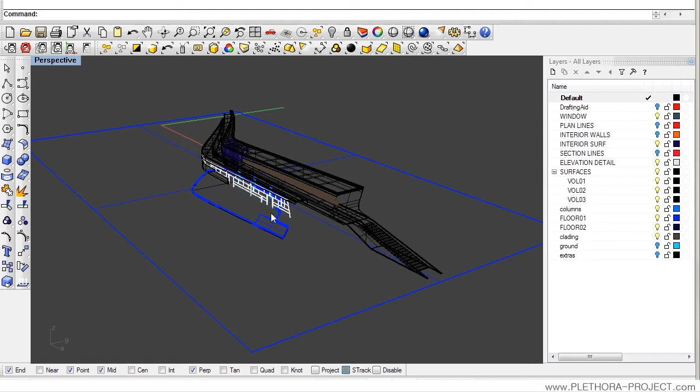I'm going to show a little bit of how to produce a drawing out of this content, hoping that you guys can actually finish the model yourselves and then make beautiful drawings with what we have learned.

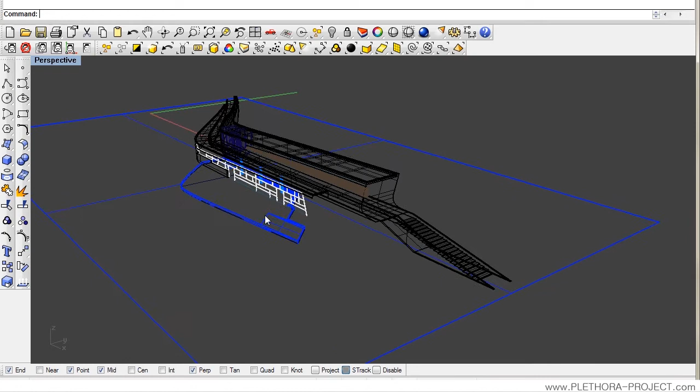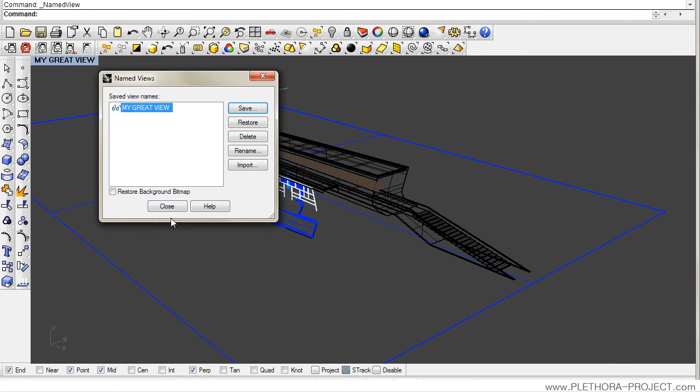The first thing I want to do is be able to store the perspective we're working in. Let's say I really like this perspective. So I'll go to Perspective, Set View, Named Views, and call this one 'My Great View.' You can see here it says 'My Great View.'

We can start moving around and decide we like some other views and name them too, but we can always just right click here and go to Set View again, and you see my views are saved. My Great View is here, and we can always go back to the saved position.

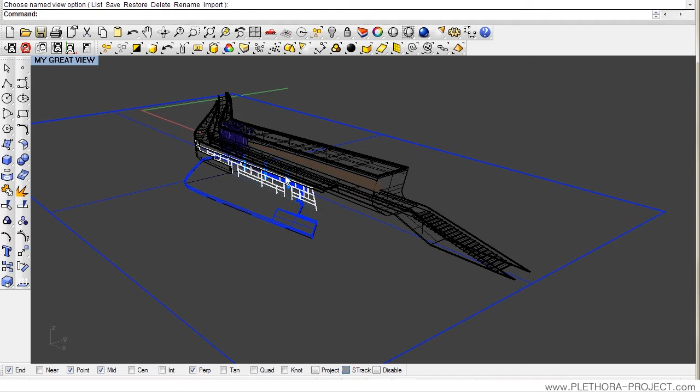This is good because let's say we start exporting content to some other package, like Illustrator, and we want to come back and do some changes. It's good that we have saved the camera, the perspective we're exporting.

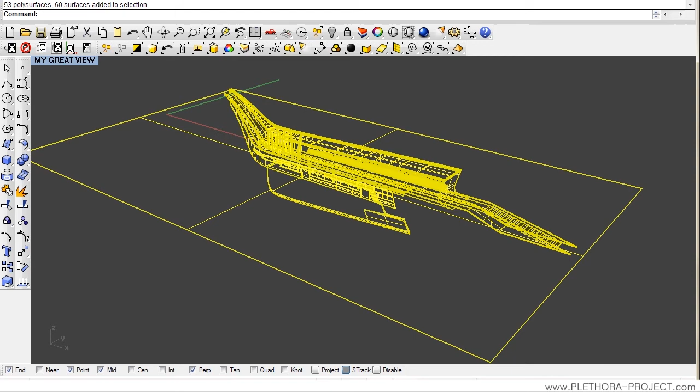So the first way to export this is to Illustrator. Let's pick everything, go into File, Export Selected, and I'll name it Test. Adobe Illustrator format, Test 01.

We export it, and everything is fine. We created a file for Illustrator, so we can go into Illustrator and open it, going to desktop, Test 01, and you see we have the drawing.

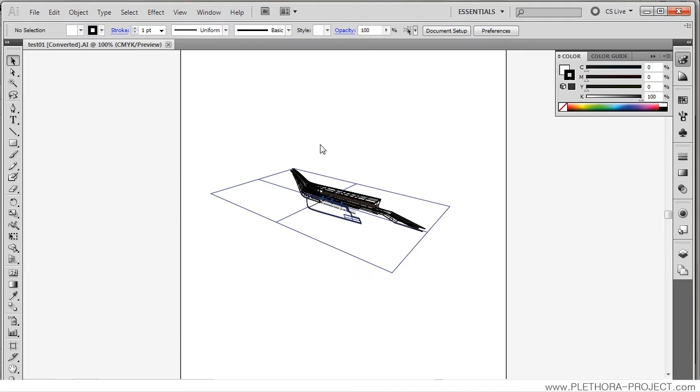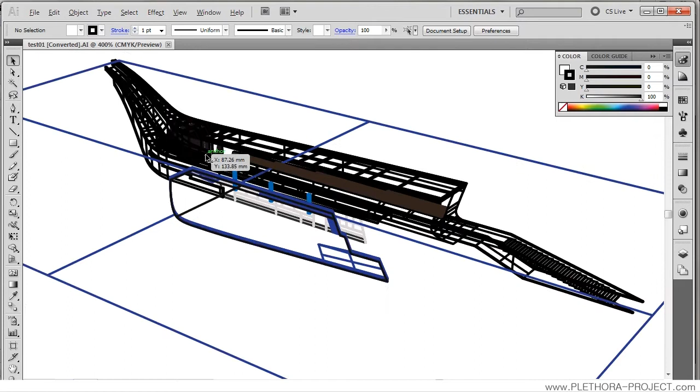The problem with this drawing is that if we zoom in—you can use Alt and the scroll wheel to zoom in and out in Illustrator—you'll see this drawing is only a wireframe. It doesn't remove the lines that aren't required for us, though obviously the line thickness is something we could change.

So let's start seeing how to deal with this drawing. I'll open this tab and close the stroke and swatches panels. The one I'm interested in is the layers, because the layers contain all the information.

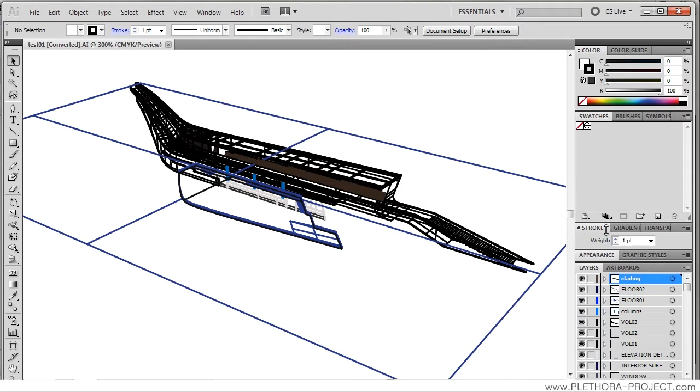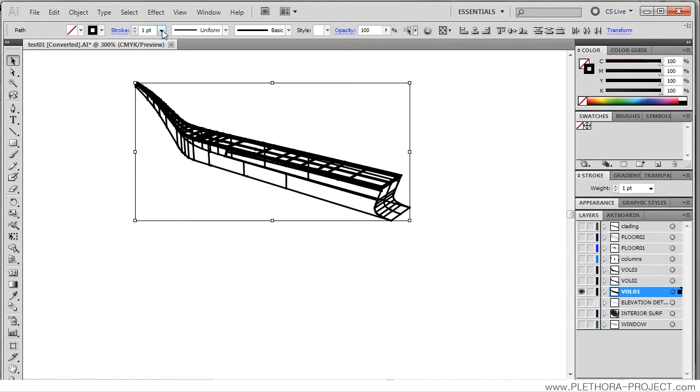You can see I can start graying out and hiding everything, and we have all the same layers that we have in Rhino. If we Alt-click here on a layer, we select each one of the individual elements. So that's something you want to do, so you can start assigning different stroke weights per layer.

0.01, really thin for instance—something like a hairline—and you can see the drawing is very detailed, and we can go really thin. Still at this point we could remove some of these lines.

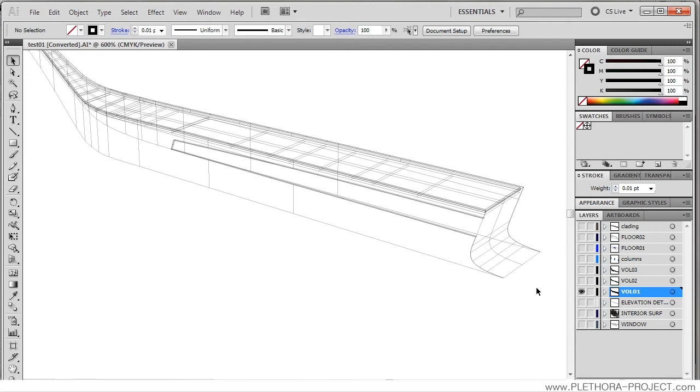If, let's say, you don't want to have that one, maybe you can delete it. And you should go layer by layer, changing the stroke weight of the layers. I'm Alt-clicking on the layer, so I could just go here and type 0.01.

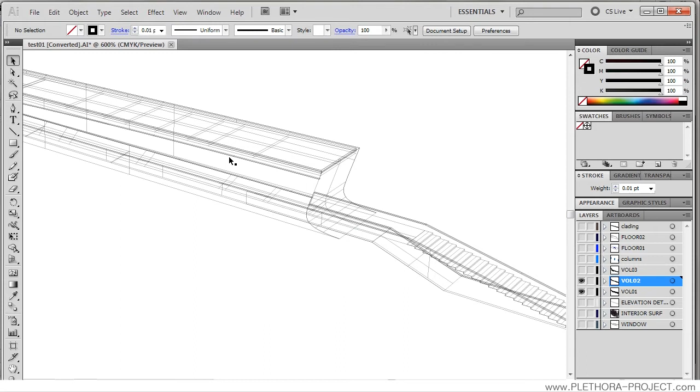Also you can specify that the color could be slightly different. So if you go for some gray color, you have to test print it because it might not really print well, but at least you have a visual reference of how these layers are going to work together.

So let's do that again—Alt-click on the layer—and maybe this one I want to leave slightly thicker. That seems too much already, so I'm going to put 0.08.

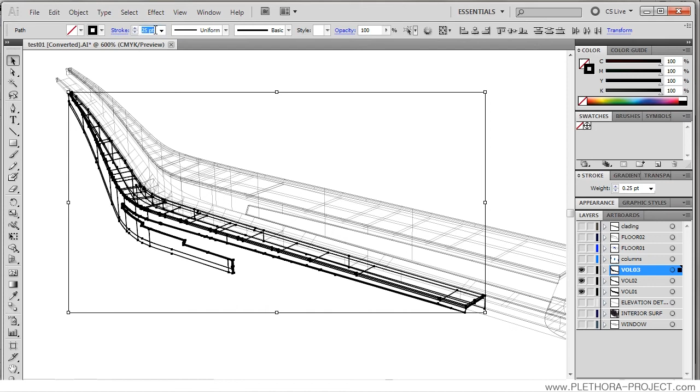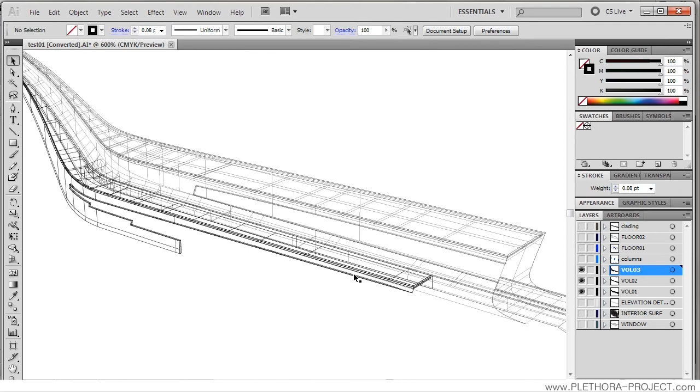If I want to work with a slightly thicker layer, I could start playing with it, and you see I could start building a little bit of hierarchy between some elements, where we start noticing a bit of difference.

This uses exactly the same layers that you have in Rhino. So if you don't have the layers organized in Rhino, I'd recommend you go back to Rhino and reorganize the layers. So this is the first technique.

Let's see a second technique. This first one isn't so good in the sense that it's just a wireframe, not an actual architectural drawing. So let's look at another way of doing this.

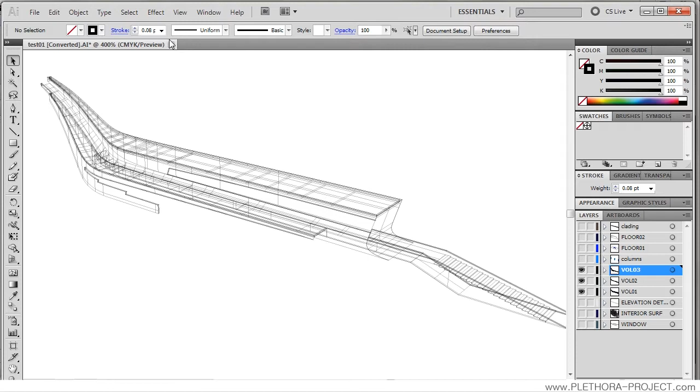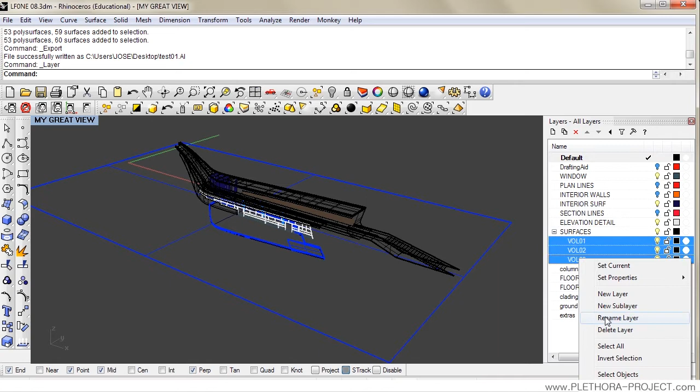So I close the Illustrator file and go back to Rhino, and open the layers here. Let's say I want to just deal with these 3 layers. I'm going to select those 3, select objects, invert, hide. So I just want to deal with only these layers.

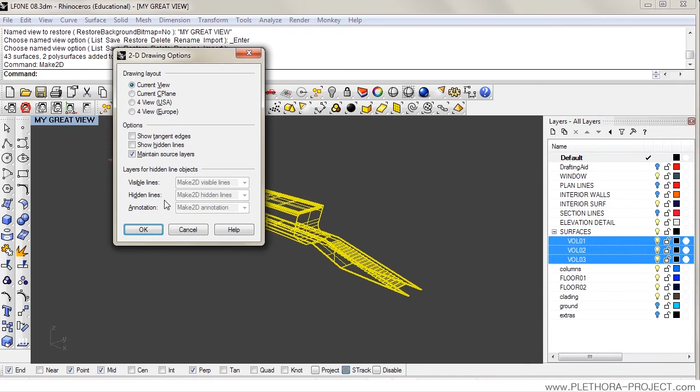We can check that we're in our view, set view, my great view, so we're in the same view than before. And maybe what I want to do now is make a 2D drawing out of this, so we would use the command Make 2D.

You need to make sure that you click here in show hidden lines, and this command will use the current view to create a 2D drawing of the geometry we have selected. It will create a new layer called Make 2D visible lines, where we'll put everything that is visible. The hidden lines will be in a second layer, and if there's any annotations, it's going to add them here too. So show hidden lines will actually make this hidden layer for us.

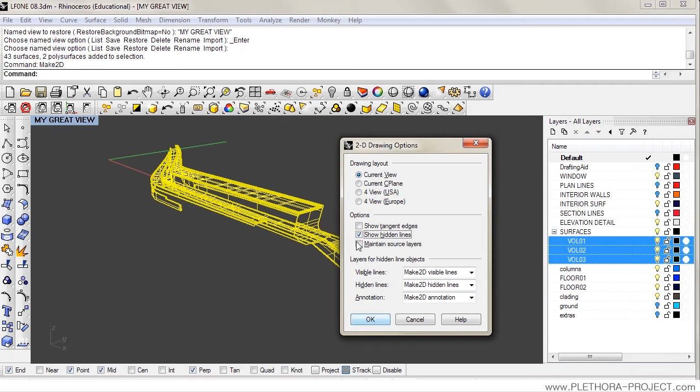Let's see what this produces, and we can make sure that you have hidden layers on. This is something really useful. I'm going to say OK, and basically you can see that there's 2 new layers here, so we can turn off these 3 layers of geometry.

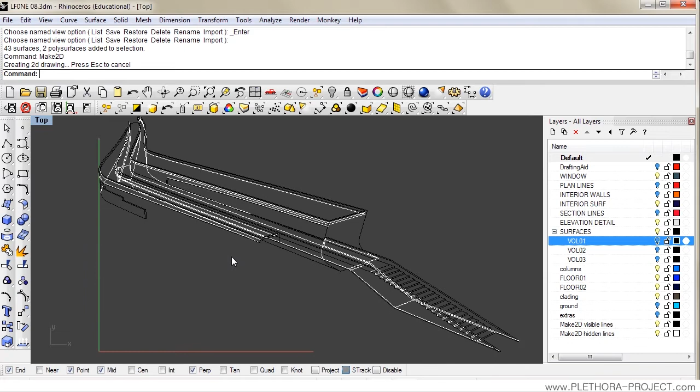Let's go to the top view here now, and you can see that we have that view, but now from the top view it's completely flat. So if we look at it from perspective, it looks deformed because it's a completely flat drawing.

So this is the way in which you start producing this drawing. You need to make sure that you're exporting this from the top view, because the view you are in is also really important for the Illustrator file. Now that this is a flat drawing, you have to export it from the top view.

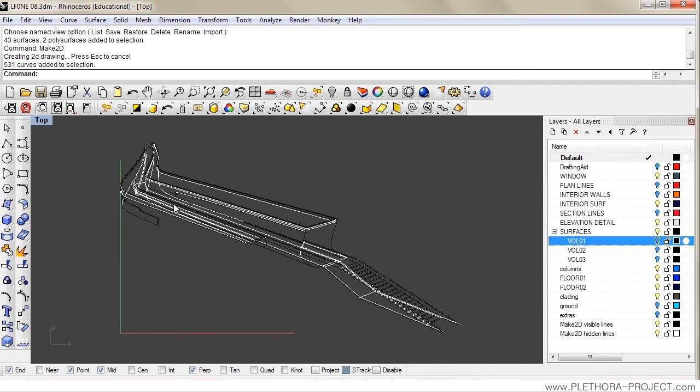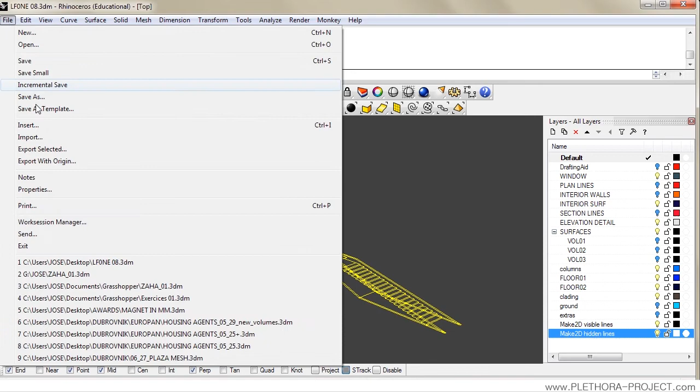I'm going to select everything and do what we did before. Notice that I have a layer that's the visible lines and the invisible or hidden lines, so I want to keep those 2. Let's see how to change the colors and some of the graphics. I'm going to select everything, go to File, Export Selected, and call this one Test 02.

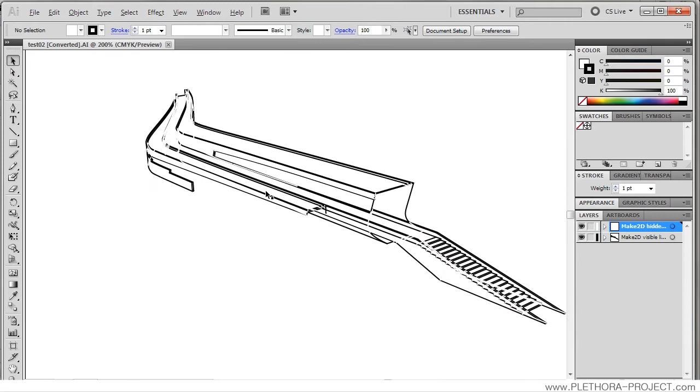Now we have Test 02 there, and we can go back to Illustrator, File, Open, go to the Test 02 file, and you can see here that we have just exported only those 2 layers.

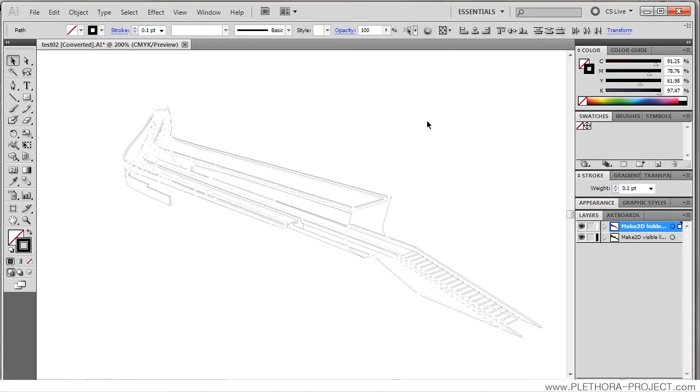Let's change this layer first to something like 0.1, and then our white layer, we could change the color by navigating here and putting it in color black, and we'll say 0.1 as well. It seems that this color is too thin, so we're going to say maybe 0.2 or 0.25.

That's looking better, and in this case 0.25 as well, and that's looking better. So these are the lines that are the visible lines, but these are the hidden lines, so maybe the hidden lines we want to put them in a different way.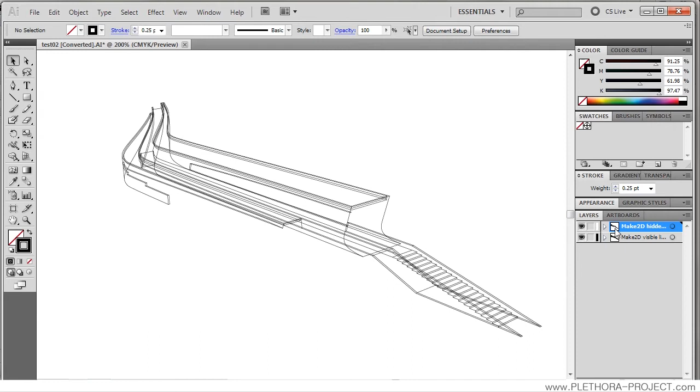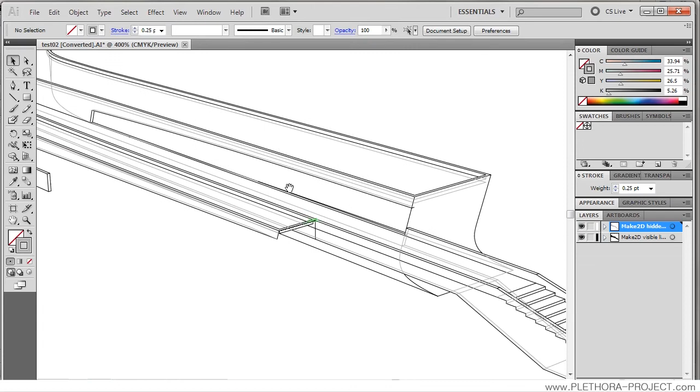I'm alt selecting, and I'm going to change the color of this to a gray, like that. And we can see now that our drawing's starting to look quite elegant, in the sense that it has lots of little issues that you probably have to clean in Rhino before.

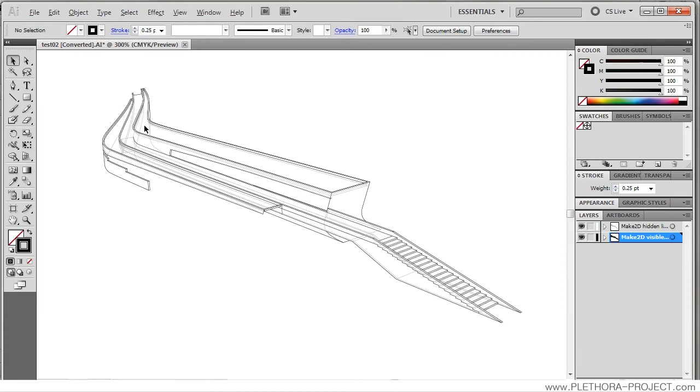You can see that it's exporting this line, so maybe these lines you don't want, you have to clean this stuff in Rhino, or change the layer. But it will remove all the lines, and everything that is in this case an interior line is going to be considered in a different layer.

Again, maybe this is too thick, I'm going to put 0.1, and I also want to, in the stroke here, show options, and say maybe we can bring this out and say I want these hidden lines to be dashed. So I'm going to make 2 pixels of dash and then 1 pixel of gap.

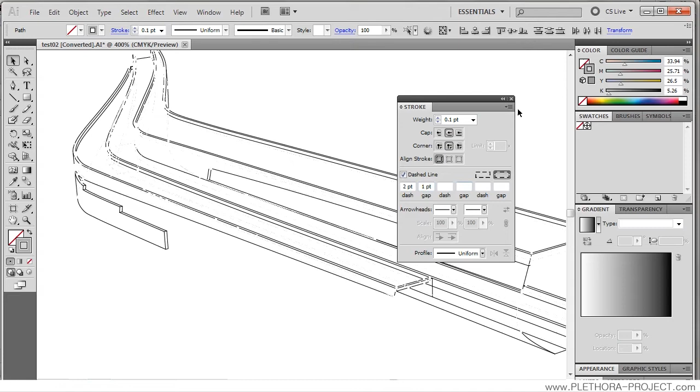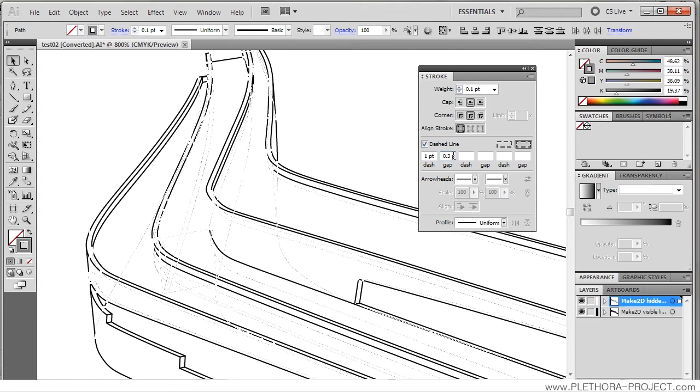So if we see that now, you can see that our hidden lines have been dashed. Again, I can alt click on this layer. Maybe I want the gray to be slightly darker, but I want to make 1 pixel and 0.5 or 0.3, and we can see that we're controlling perfectly and very accurately the quality of the drawing.

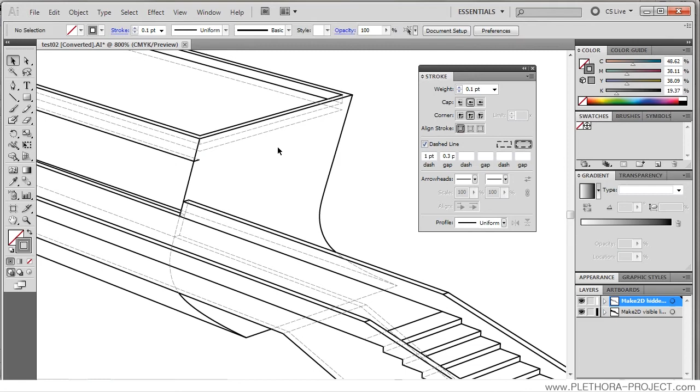And everything is vectorial here, and still we can clean any imperfection. Let's say here I don't like this line here, I can delete that one, and I could even try to move that one there.

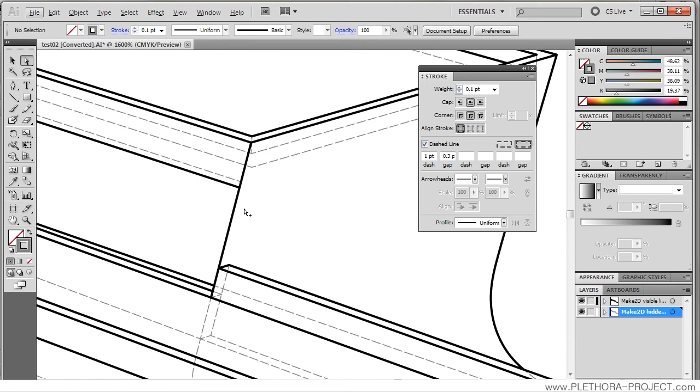So you see, the order of the layers is important, so we make sure that our black layer is on top of everything else, the main one, and we're missing a line here. This kind of stuff is better to add in Rhino if you have any problems like that, but if you're already at this stage, you can solve it here.

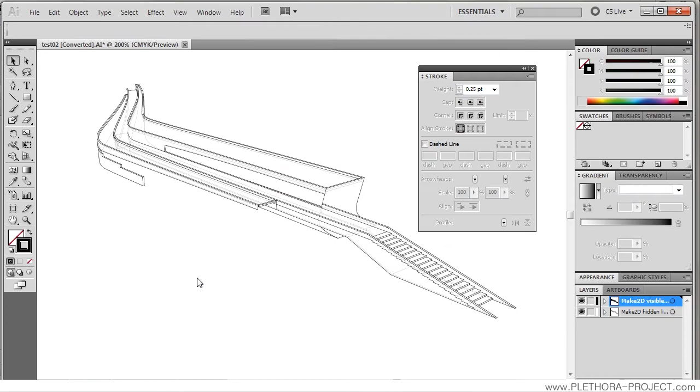I'm going to show one more thing in this video, how to do a fill. You can see that we cannot really make a fill of anything, these are individual lines, and we cannot really assign a fill to something. So I'm going to close that, not save it, and go back to Rhino and explain the fill.

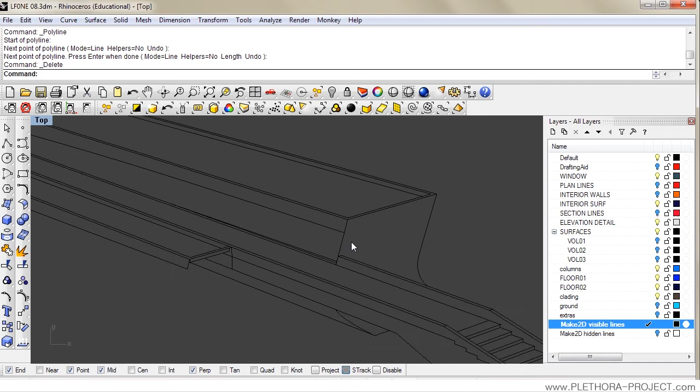So what can we fill? For instance, in this case, I would just go into this layer and quickly add some of the lines that I see are missing. So in 2D, or maybe even remove some of this stuff. So I could say, well, what about this?

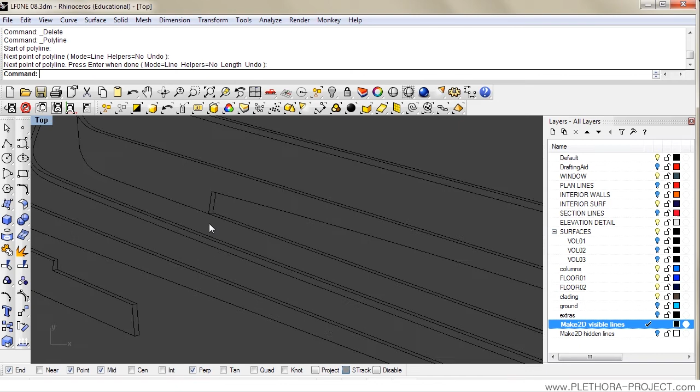So this roof is also missing some stuff. It's important to know that there is some additional work to be done in 2D, like clipping or trimming some lines that might have some errors. So that's something to consider.

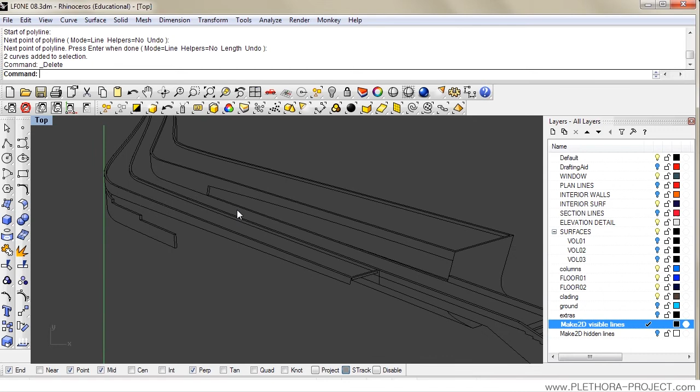It doesn't come as perfect as we would want to, right? For instance, a few things here, you can always remove that, and you start cleaning a little bit the drawing. But let's see, what if I want to just maybe these elements, or the roof?

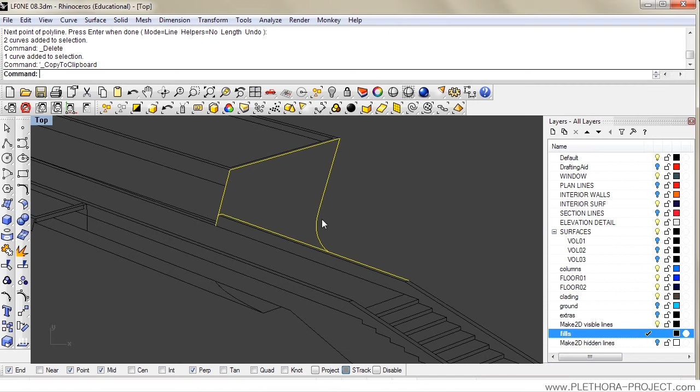Or this element here, we could want to do a fill. So let's make a new layer that we will call fills, and between this element, this element, this element, that element, and those elements, I'm gonna copy them and move to my fills layer and paste them. So I'm going to make a copy of those elements.

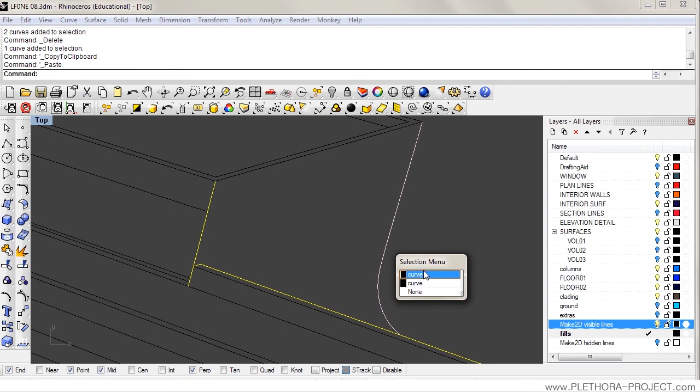So I can see, well, not really. Let's try again. We have created a copy of each one of them, but we didn't move them to the next layer. So let's select them now. These are the elements. Let's say fills layer and then change object layer.

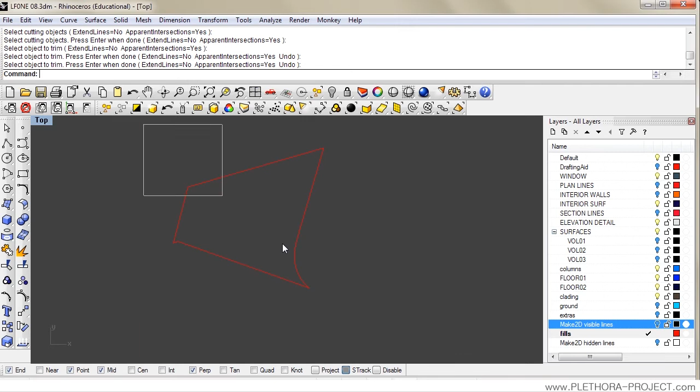So in this case, maybe this is red layer. Doesn't matter the color right now, it's just to make sure that we actually do have, let's say, what if we want to fill this element here, we can go in trim and select the excess. So we can actually join by pressing J, enter. So we join the curves. Now we know that this is a join curve.

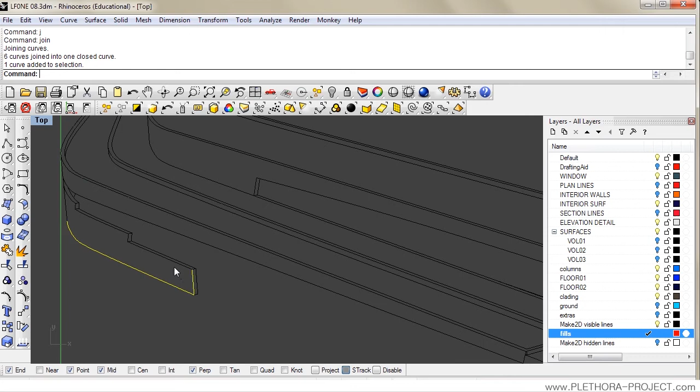So you can select the object, and now, for instance, let's do that for a few different ones. So you could say maybe this one. I'm going to copy with Ctrl C, Ctrl V, change to fill layer, and you see that I have this stuff. We could try to join it right away by pressing J, enter, and it works apparently.

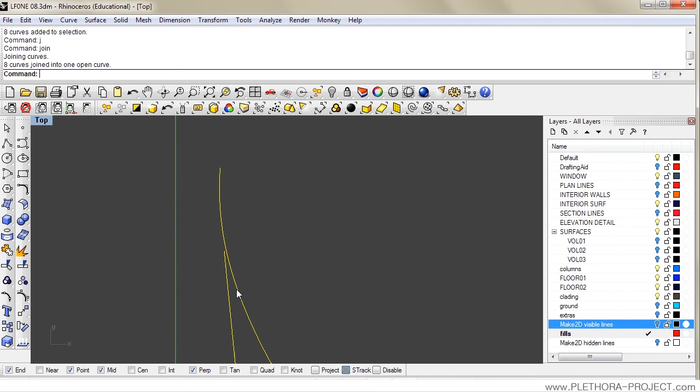It seems that this is an open curve. 8 curves have been joined into an open curve, so that might be a problem. So you want to make sure that it's a closed curve.

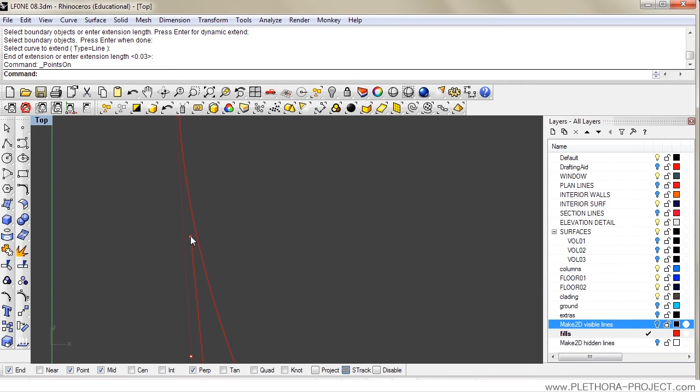So what I'm going to do here is extend, select the boundary curve, this one. Okay, this is becoming tricky here, so we could do something like just cross it a little bit and trim it. Let's explode it first, trim, there we go, and I'm gonna trim also the other direction.

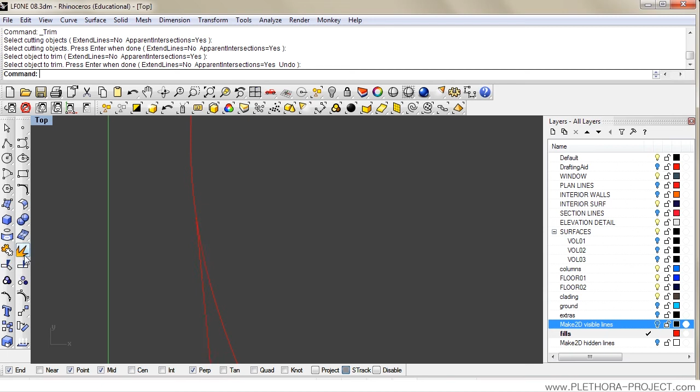This is not the most accurate example, but anyway, it's just showing that we need a closed curve. If not, this won't work. And this one is also a closed curve, so that's excellent. So we have those two elements.

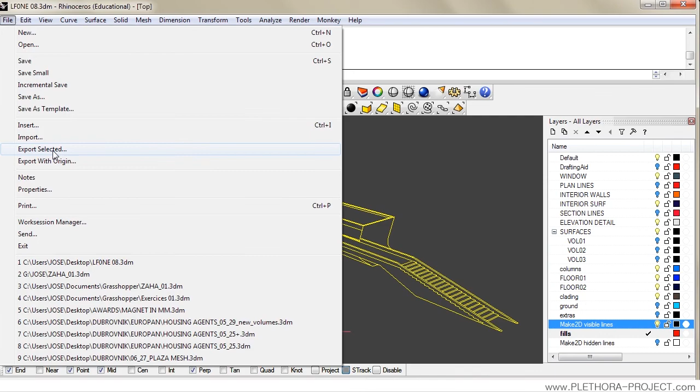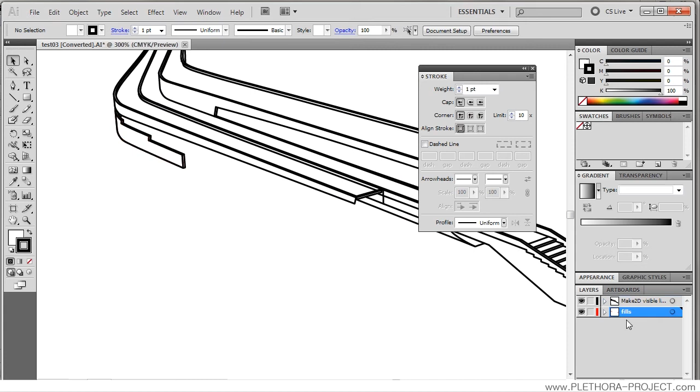We can actually export this again. File, export selected. I'm going to say test3. Perfect. So now we can go back to Illustrator, File, open recent files, now open test3, and we have this red layer. We can put the red layer below, and I'm gonna alt select this layer to just make it really thin.

And our red layer I'm gonna alt select, and this layer I don't want any stroke color. Basically I don't want it just to draw the line, I just want some fill. So I can double click on the fill and put some light gray here. You see that that works, and I could just basically need to specify that my stroke color is empty. So I need to specify empty, so no stroke color. You can see also here the empty.

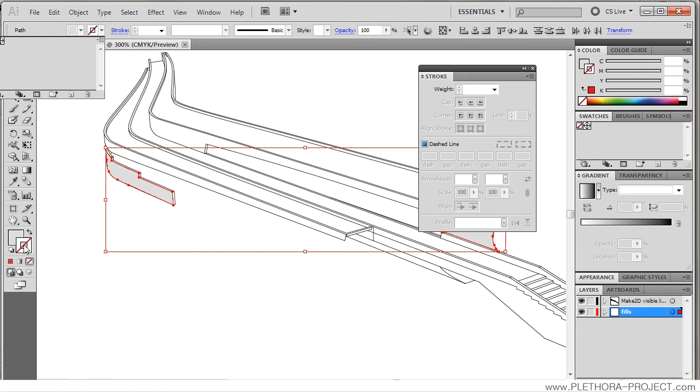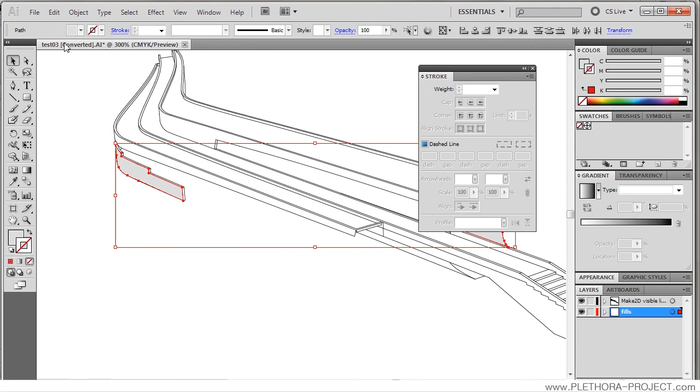So now we have specified in a very clean way as well. You can see the clean and beautiful quality of the vector drawing. Again, alt select, it will select all these kind of closed curves in these layer fills, and you can actually select a different color, maybe something darker.

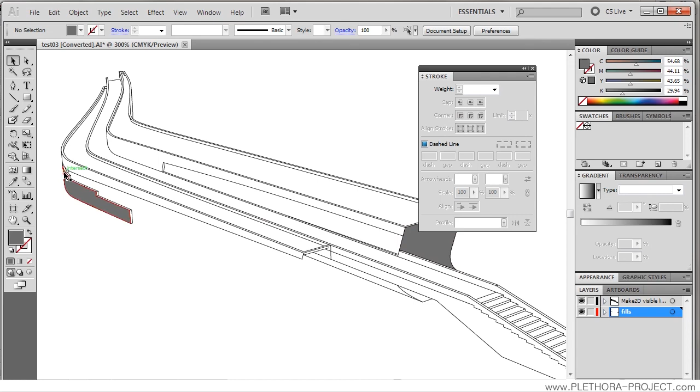If you're working with some shadows or something that you want to shade, there's a lot of theory about what to shade. If you would like to shade something, like everything that it's looking from this direction, maybe you want to shade or highlight. So this would be the tools that will allow you. You can also draw some things yourself, like some closed curves, in order to just produce different fills and patterns.

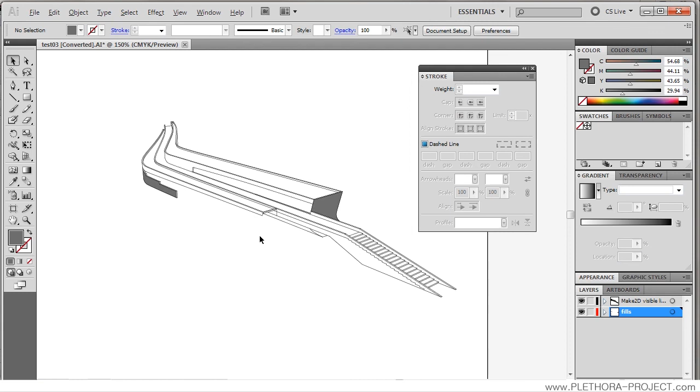So this is the tutorial of how to export. Try to work in this file like this, and then eventually take everything, reformat this document into the A2 that we will be working on, and with that you should be able to start printing and seeing some results.